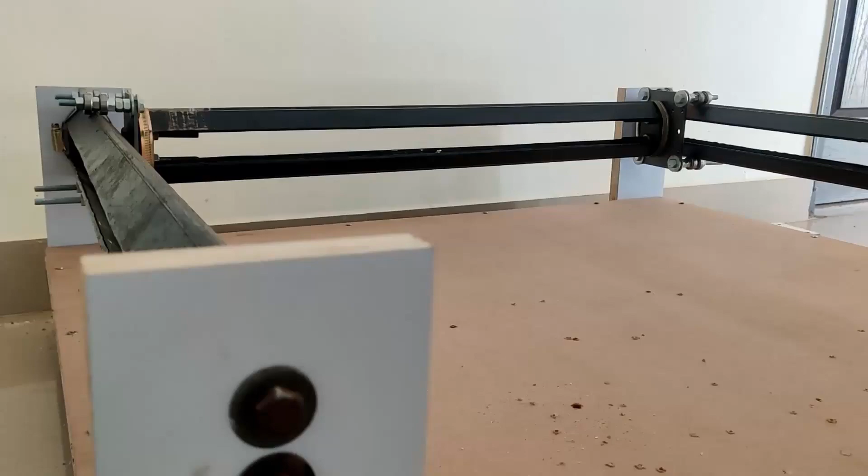Hi everyone, this is Pawan and today we are going to build this.

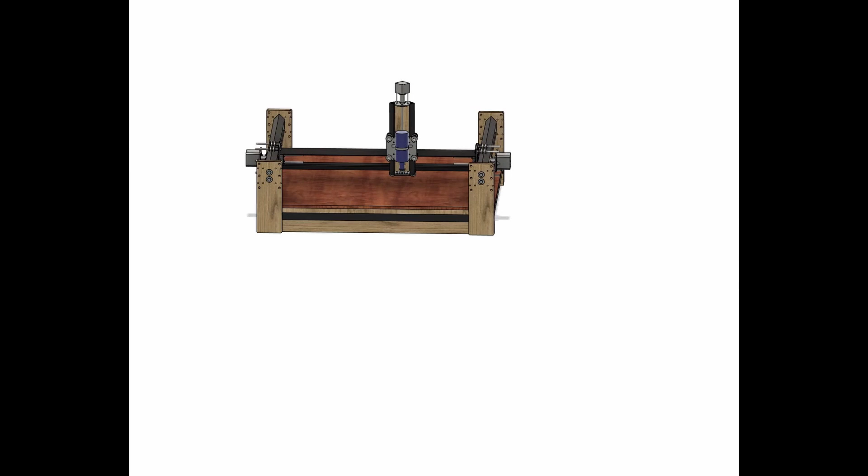Before we start, I want to talk about how we are going to achieve the linear motion that is required. As you can see, we will be using ball bearings for this. A pair of bearings separated by a nut on a bolt, and 4 such pairs will make this possible.

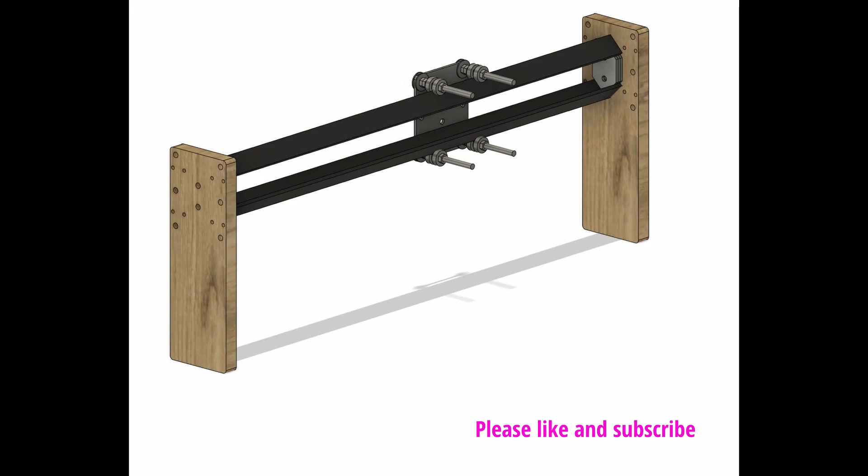We will use a bolt, a washer, gantry plate, 2 or 3 nuts as needed, 2 bearings separated by a nut, and a final nut again. I will explain this better when I'm actually building this.

In order to achieve this, the dimensions of the angle holder and the hole separation in the vertical direction on the gantry plate are very critical. As you can see, the angle holder is made from 53 mm square and cut on all sides, and the dimensions of the gantry plate are shown here. If you use this setup with 5 mm thick angles, then everything will fit perfectly.

I made this X-axis rail the same way I did the other two, but this one uses gantry plates instead of side plates. So the next step is to mount the bearings onto the gantry plate.

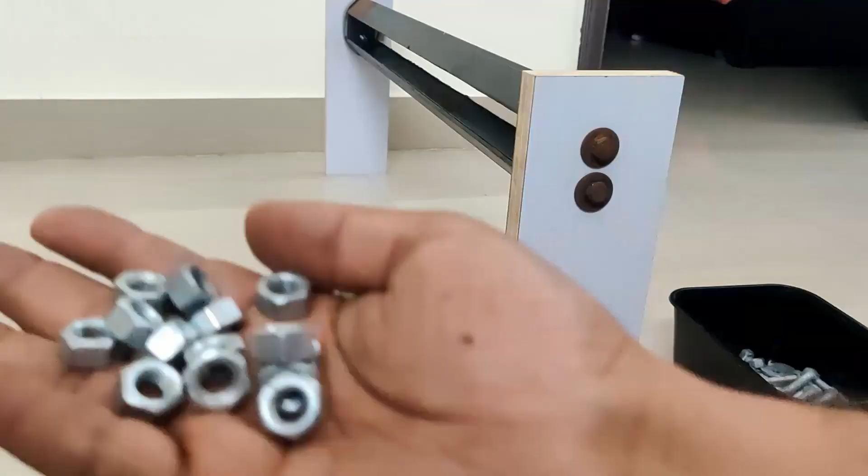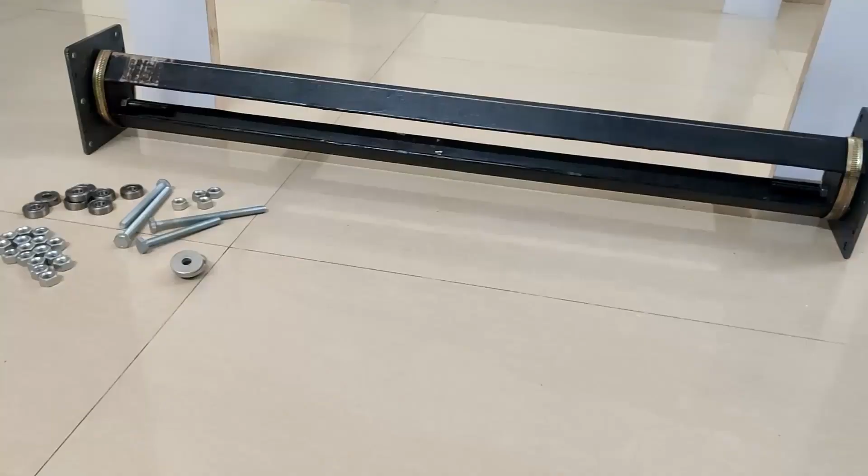At this point I noticed that the nuts I'm using are not all of the same thickness. Some of them are 6.6, 6.7, and the others are 7.4, 7.5. So I separated all the nuts of the same size and used them. This is important in order to avoid any misalignments.

So I gathered everything that is needed to assemble the bearings. We need 4 bolts, M8 bolts, 2 of them 3 inch and 2 of them 4 inch. We need same thickness nuts, M8 nuts, about 20. We need 8 bearings and required washers.

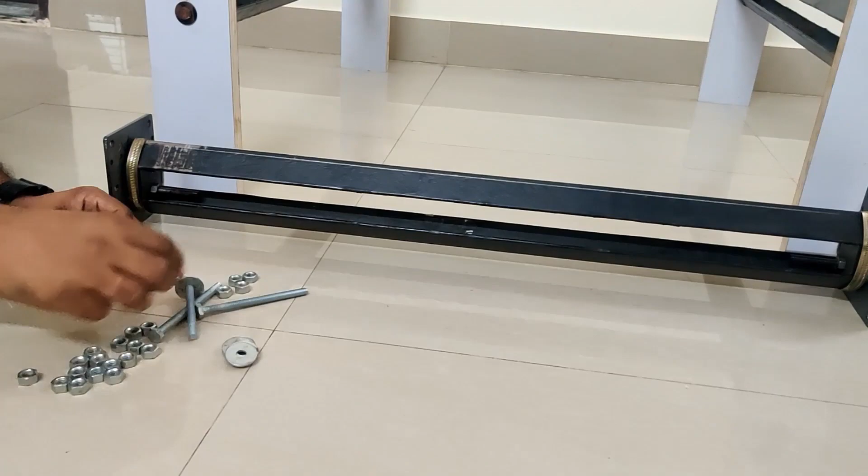The assembly is reasonably straightforward. As I mentioned, we will use a bolt, washer, gantry plate, another washer, 3 nuts. These 3 nuts are required to clear the angle, meaning the space between the gantry plate and the angle is covered with these 3 nuts.

As you can see, the bearings will be outwards to the rail, and they will rest on the Y-axis rails. So this is a fairly straightforward process. You have to make sure that you are not actually tightening it. These things we have to tighten after we have mounted them on the axis rails. Otherwise, it won't be easy to mount them.

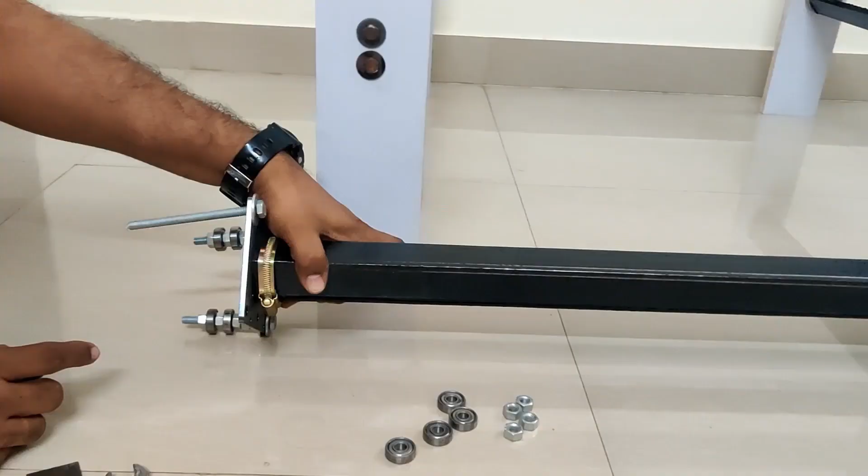So the top 2 bolts should be 3 inches and the bottom ones should be 4 inches, because we will mount the stepper motors on the same bottom 2 bolts. That is the reason their length is more.

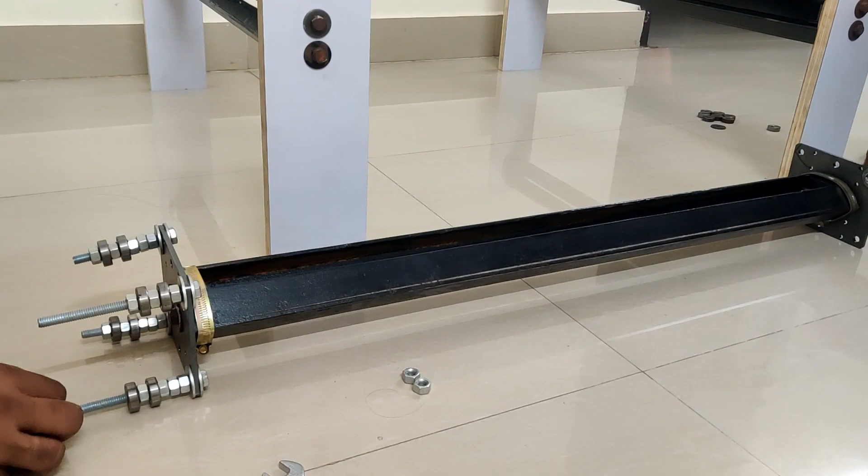You can see I've made some mistakes. Instead of 3 nuts I've put 2. So I removed it and put it back together. This is a reasonably straightforward process.

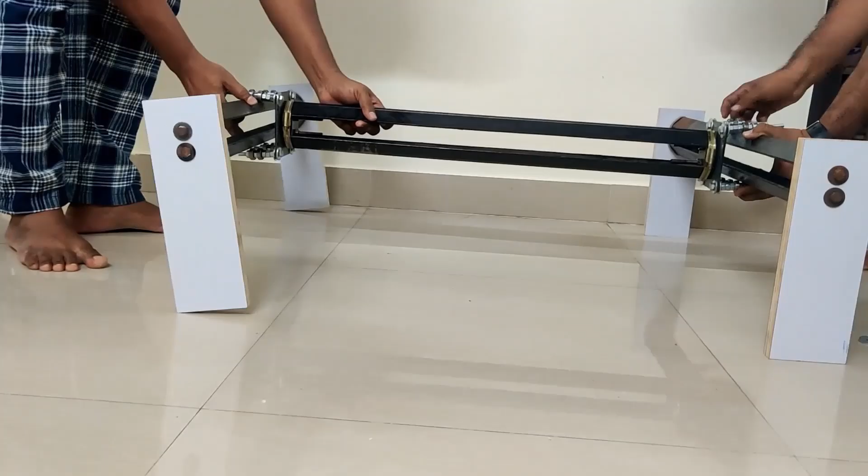Okay, now that we are done, we make sure that all the bolts are loose, none of them are tight. The next step is to mount this onto the Y-axis rails, and this is a 2-person job, so I requested a friend of mine.

The next step is to simply tighten all the bolts. This is very easy. I did it off camera, and once you have tightened, you can see that there is no play in the gantries.

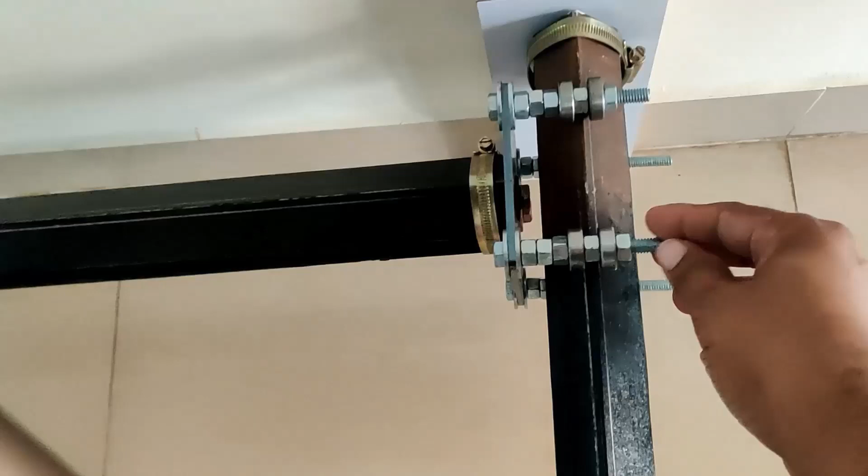But at this point in time, if you try to slide it in the Y direction, you will not be able to slide it properly. There will be resistance, because since the Y-axis rails are not grounded, you will notice that they are not parallel to each other. So in order to get them parallel, we have to first space them apart on both sides.

With exact distance in mind, I used a 50 mm plywood piece, and we are going to attach this to the side plate so that the distance on both sides is the same.

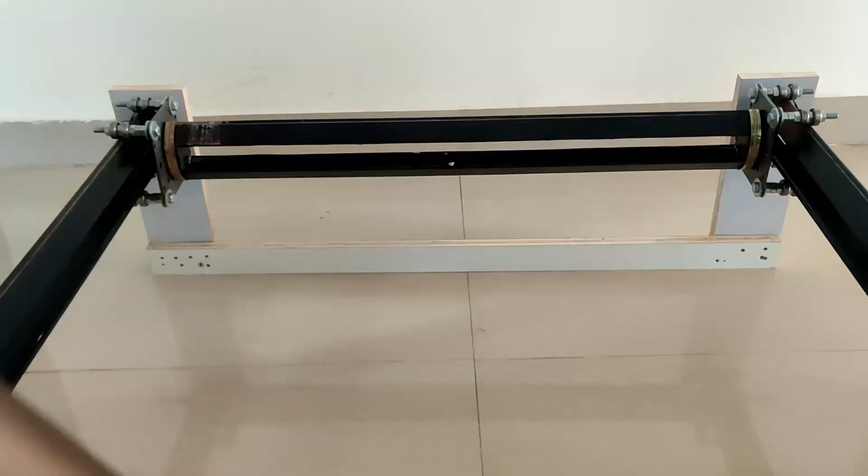So we start by drilling holes on both sides. As you can see, this is not my first attempt. I had assembled it first, but I removed it since I forgot to turn on the camera.

So in order to attach it, first you need to move the gantry to one side and attach the plywood piece to the side plates on the same side. That way we know that it is exactly spaced.

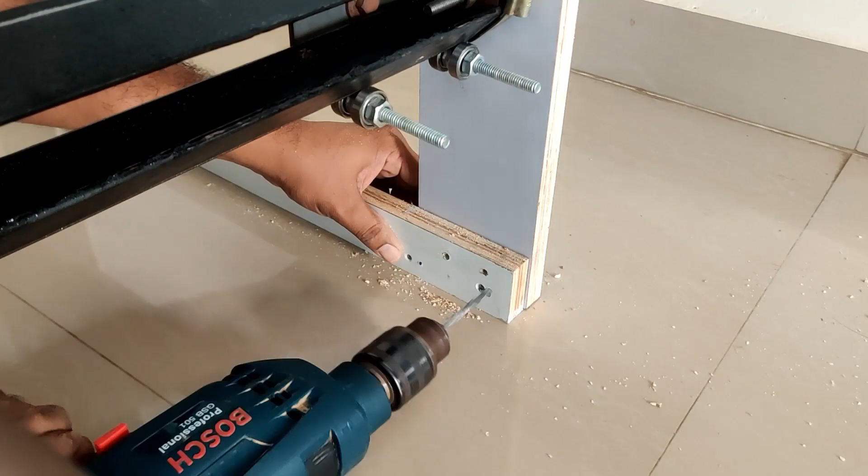I am using 2-inch 4mm nut bolts, not screws. Screws might not work, but use whatever you want, just make sure that they are very tight and snug. Use washers as needed.

And on the other side, I did the same for all 4 sides. Like I mentioned, you need to move the gantry to one side and then fasten these. It is a good idea to intermediately check the angle, that it is perpendicular. Sometimes if there are any misalignments, you can very quickly fix it with a few smacks with a hammer.

Now you can see that the gantry will move smoothly without any resistance. There is practically no resistance and there is no play. There is some resistance, but that is because of the weight of the angles, not because there is actually any resistance from the bearings. So the stepper motors will be able to move these very easily.

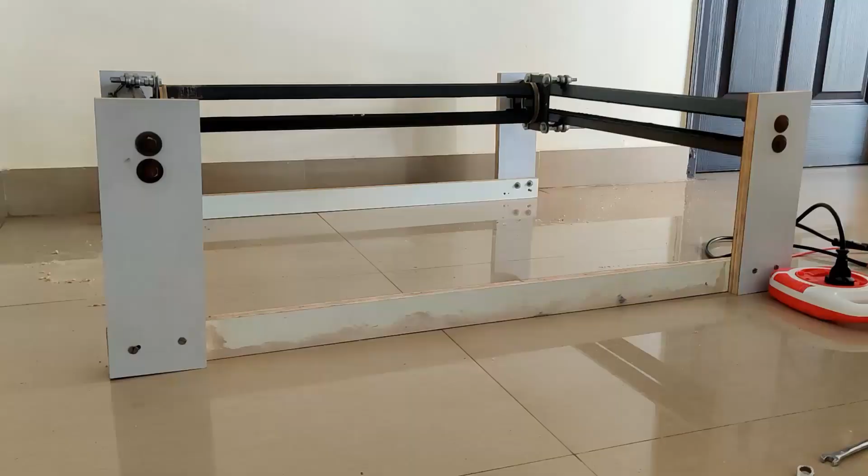The next step is to build the base on which the wasteboard will sit. I am using plywood, one side laminated and the other side I painted black. What we are going to do is place the black side up and rest it on the plywood pieces that we have used.

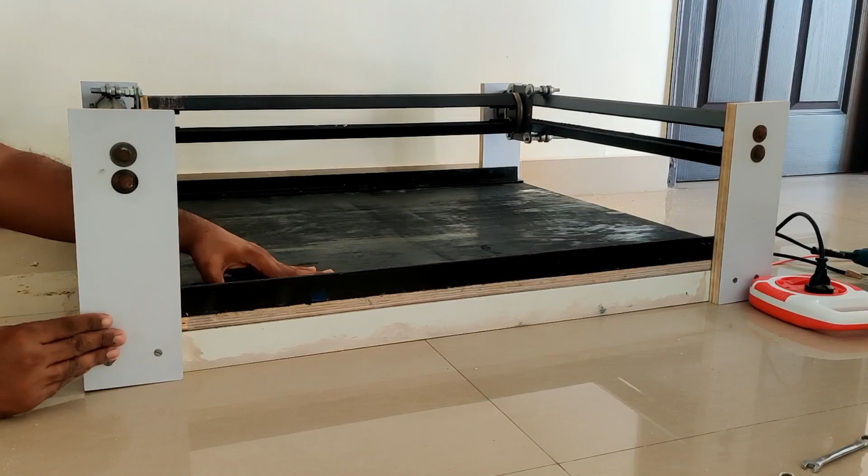This is because we are going to fasten the angles on top of this and then reverse it. Eventually the white side will come on top and the angles will be on the downside. That is the idea. These angles are the same as the angles we used for the X and Y axis. The only difference is they are 3 feet, and you need to pre-drill the holes for these to accommodate the screws. If you drill them after mounting, you will screw up the alignment. So I have pre-drilled the holes and I am going to fasten these to the plywood now.

It is done. You can see the screws. Now the next step is to remove this and put it back white side up. That way the angles will be on the bottom side and the white side will be on top. This is done mainly to provide mechanical support for the wasteboard.

Wasteboard is going to be made of MDF, so it won't be this strong. The wasteboard I am using is 12mm MDF.

And that will be on top of this. So you need to cut this plywood and the MDF to size. I took help from a friend who has all the machines. I didn't do it myself, but there you go.

That's it. The next step is to fasten the MDF on top of the plywood. I'm using 1-inch screws. To do that, I pre-drill the holes so that this is smoother.

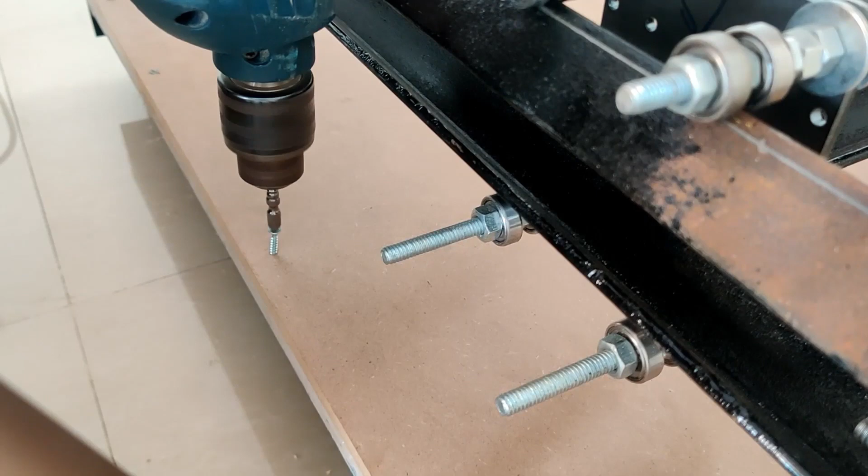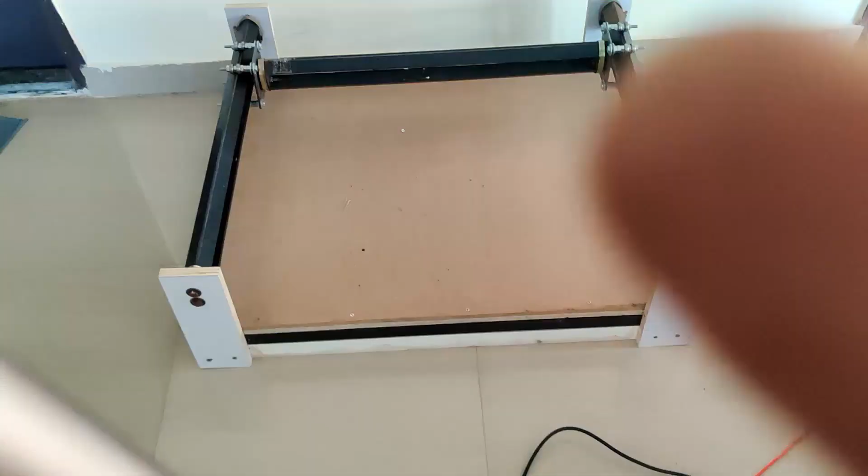Now it is beginning to look like the CNC machine. As you can see, it is very smooth. There is no play or resistance in that.

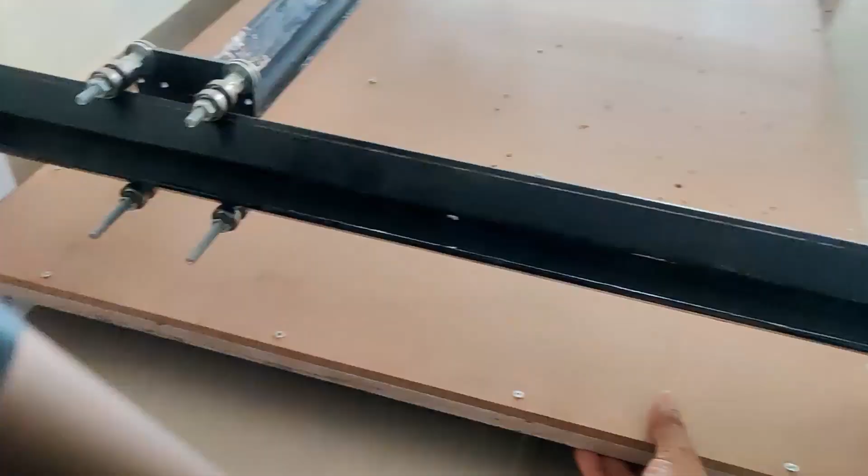The next step is to fasten the angles to the side plates. Now we have not done that, so it is still loose. We are going to do that next.

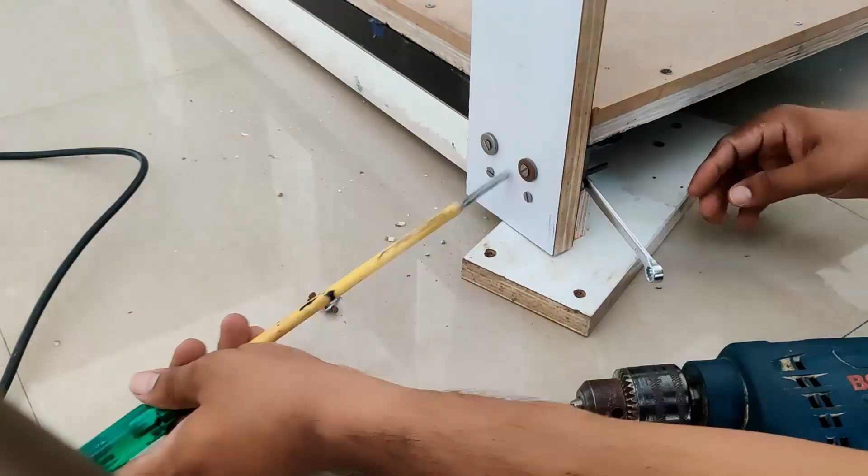Again, here also the holes are pre-drilled in the angle, and using that as a template, we are going to drill holes to the side plates. I'm using 4mm bolts, 2-inch bolts. Actually, at this point of time, I ran out of 2-inch bolts, so I used 3-inch ones only because I didn't have any more 2-inch. Now, I have used flat head bolts here, which was a bad idea because it was hard to fasten them. So if you are doing it, use hex top or head bolts, whatever they are called.

So this took some time, again demonstrating my lack of experience. But yeah, I've tightened it. I took my time and tightened it, and now it is really starting to look like a CNC machine. As you can see, there is practically no play and no resistance. It is really smooth. I'm very happy with the way this turned out.